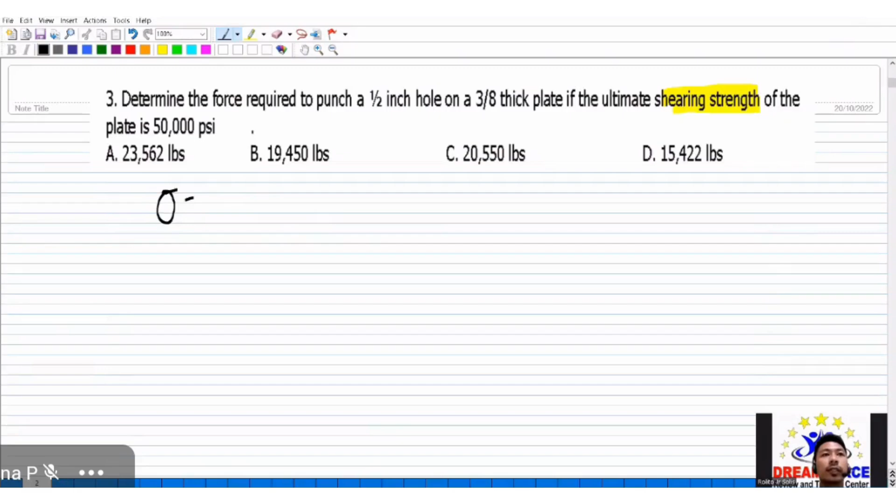So that would be your number 2. If Pascal is not in the choices, you can use Newton per square meter, or PSI. Pascal or PSI. Okay, so next, number 3, solving. Determine the force required to punch a 1/2 inch hole on a 3/8 thick plate if the ultimate shearing strength of the plate is 50,000 PSI. So here we have simple stress, and the given is shearing strength. As discussed in the lecture, when shearing strength is what we're using, use the formula for area which is pi times d times t. Again, using the formula for simple stress, we have stress equivalent to force divided by area.

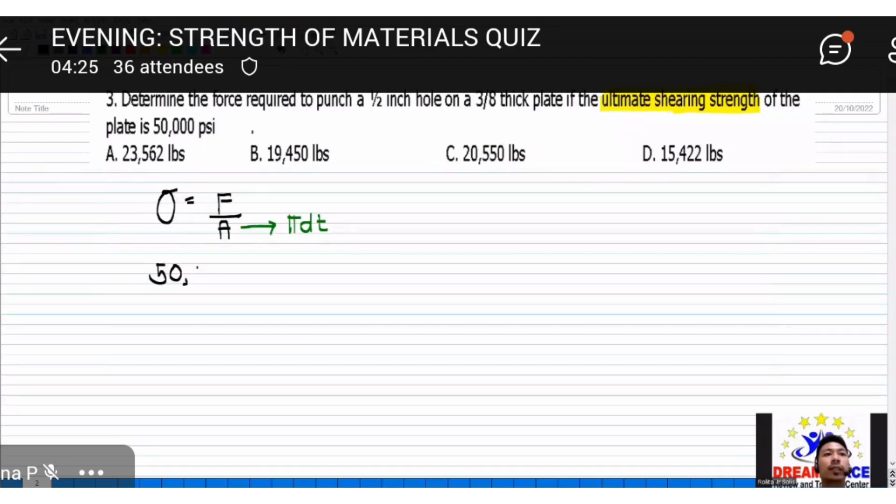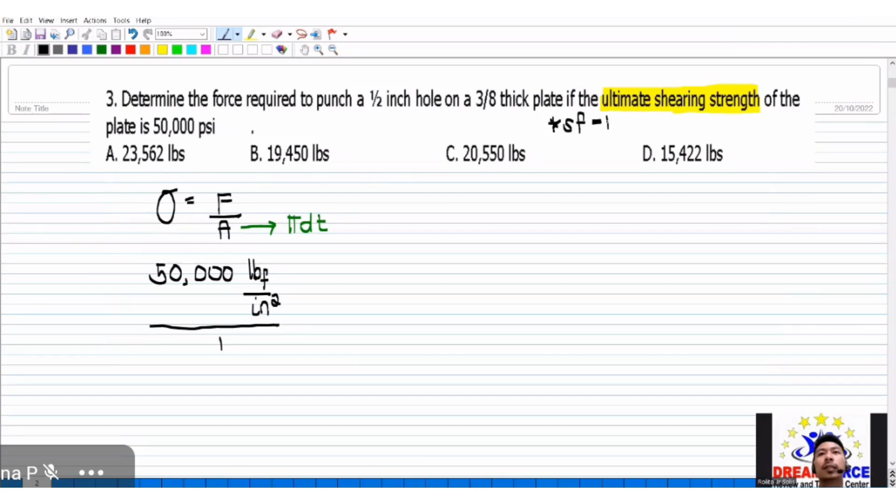The given is ultimate shearing strength, but we are not given a safety factor. So therefore, let's assume our safety factor is 1. From that, the ultimate shearing is also our allowable strength. So anyway, let's substitute - we are looking for the force. From that, we have our 50,000 PSI, which is also pound force per square inch. Let's just divide it by 1, since no safety factor was given, we assume it's 1. This is our allowable in the formula.

This is equivalent to the unknown force divided by pi, and then the diameter given to punch a 1/2 inch hole. Remember, by default, if no radius or diameter is specified for a circular cross section, always assume it's the diameter - like here, a 1/2 inch hole, no radius or diameter mentioned, so we assume diameter. So pi multiplied by 1/2 inch, and then also multiplied by the thickness, which is 3/8. Unit analysis - inches squared will cancel out with inches squared. So from that, calculate: we have pi times 0.5 times 3/8 times 50,000.

The answer there is 29,452.43 pounds. As you can see, engineers, in the choices, that's not there. So therefore, what we did is correct, so we are very confident with that.

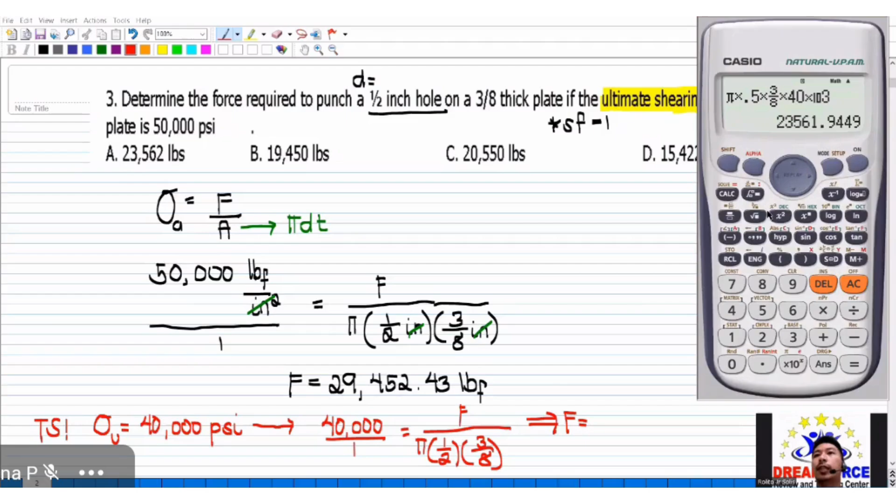Let's try 40,000. Divide it, again with safety factor of 1, so it's equivalent to the force divided by pi, times 1/2, times 3/8. Let's try - from here we already have an answer. So let's just replace the 50K with 40K. The answer there is 23,561.94 pound force. So from the choices, it corresponds to letter A. So therefore, our troubleshooting was correct.

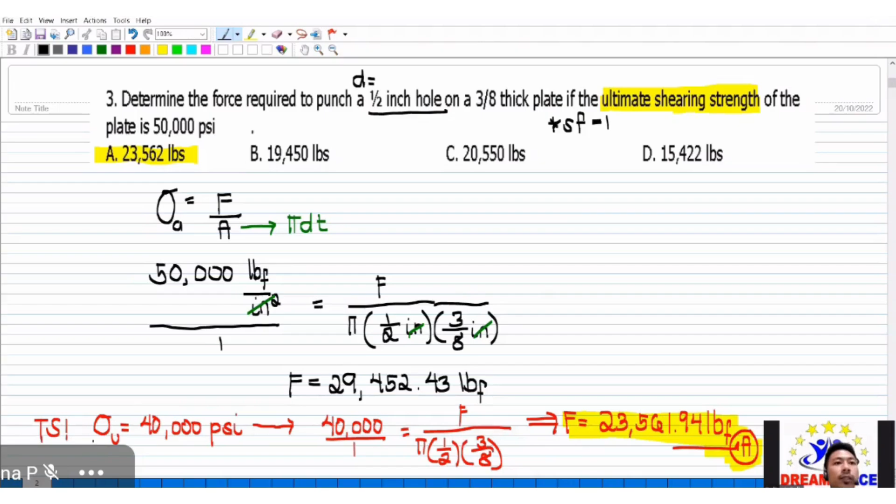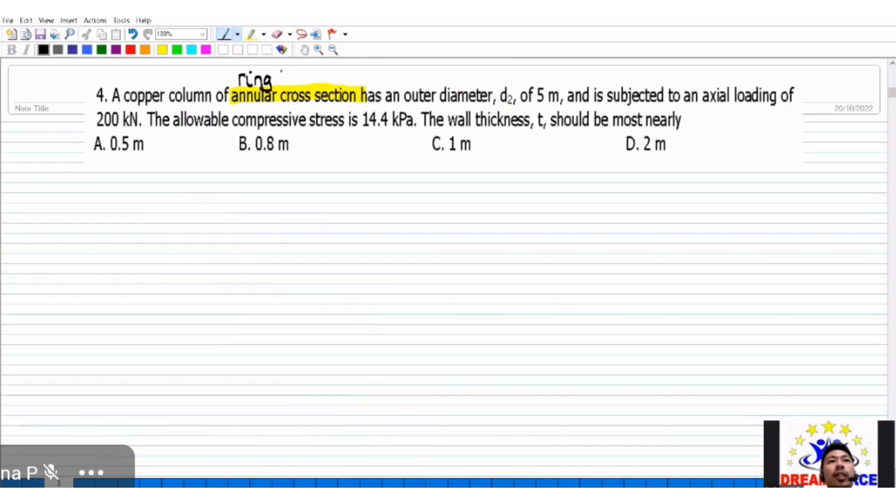Next one, let's solve number 4. A copper column of annular cross-section - annular means ring-shaped, so our cross-section is ring shape, meaning it is hollow. It has an outer diameter D2 of 5 meters and is subjected to an axial loading of 200 kilonewtons. The allowable compressive stress is 14.4 kPa. The wall thickness T should be most nearly blank.

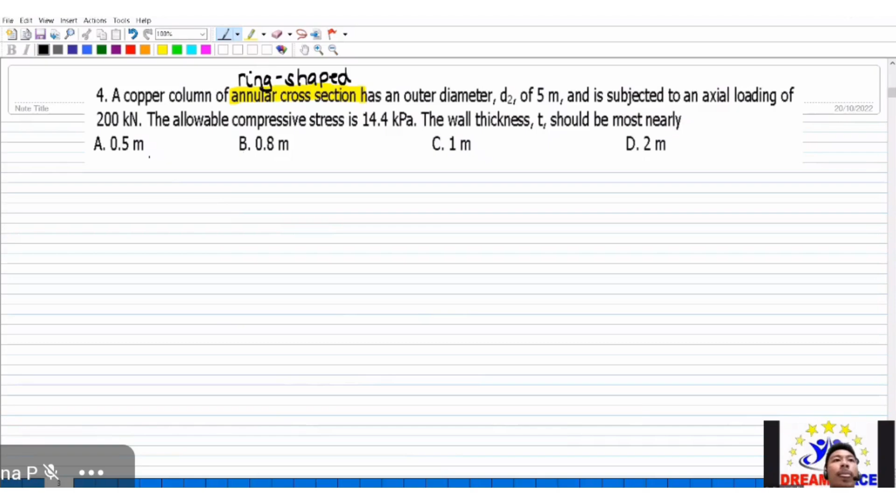As we discussed in the lecture, when it's hollow, we use either pi dt or outside square minus inside square. Keyword: if you have axial loading, or you might see tensile or compressive, use pi over 4 times outside minus inside. Also, ring shape is the keyword for annular cross-section.

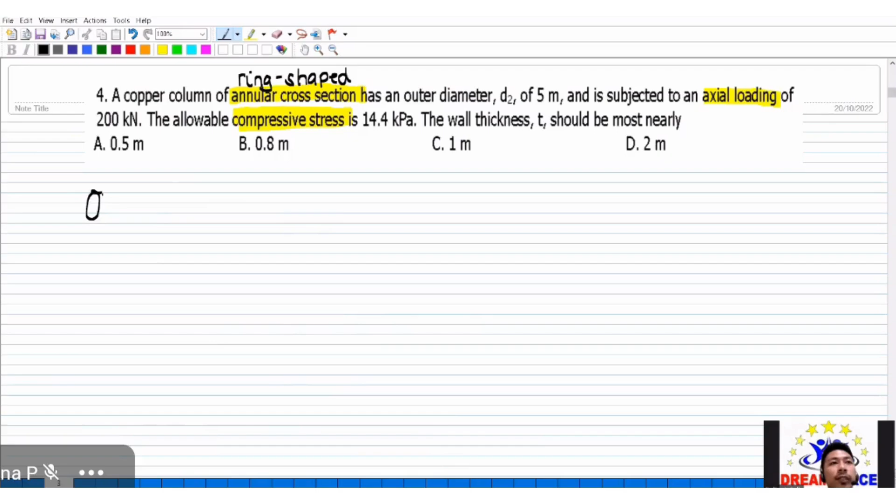So we have stress again - simple stress that is equivalent to force per area, force divided by area. Let's put it here. We have a hollow cross-section and axial or compressive loading, so compressive stress. Therefore, I will use pi over 4 times the outside square minus the inside square.

So here we have d2 - outside and inside. What we're looking for is the thickness. We have a relationship: we can replace outside diameter as inside plus twice the thickness. Since the outer diameter is given, I'll replace the inside in terms of outside diameter and thickness.

From that, we can now substitute. As you can see in the choices, it's in meters, so we'll base everything in meters. We have stress 14.4 times 10 raised to 3, since kilo - pascals, which is also Newton per square meter. This is equivalent to the given force, also 200 times 10 raised to 3 in Newtons.

So divided by pi over 4, multiplied by our outside diameter, which is 5, also in meters, squared minus the inside - but the inside is also the outside, 5, minus twice the thickness, squared. Engineers, no need to simplify - it's just one unknown, so don't simplify it, just enter that into your calculator.

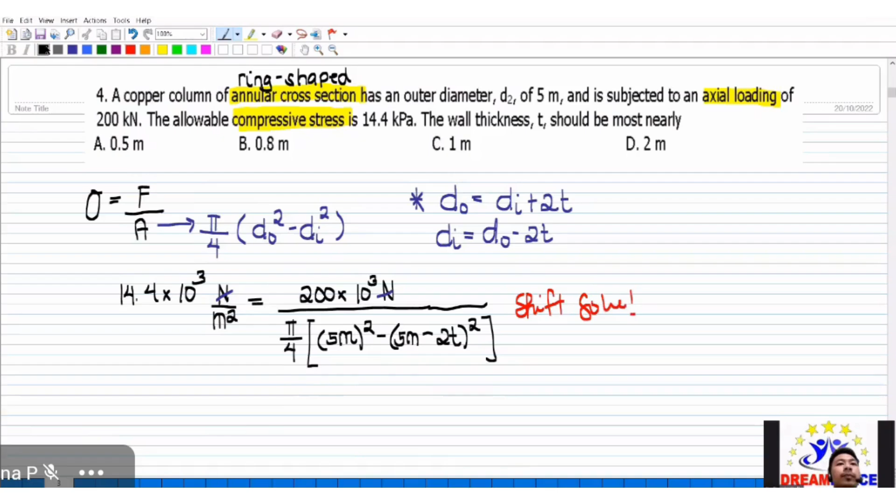Shift solve. The thickness would then be found - since this is algebra, to speed up the shift solve calculation, put in a limit based on the choices. So we have pi over 4 multiplied by 5 squared, minus 5 minus 2x, so 5 minus 2x squared, then shift solve, let's say 1.

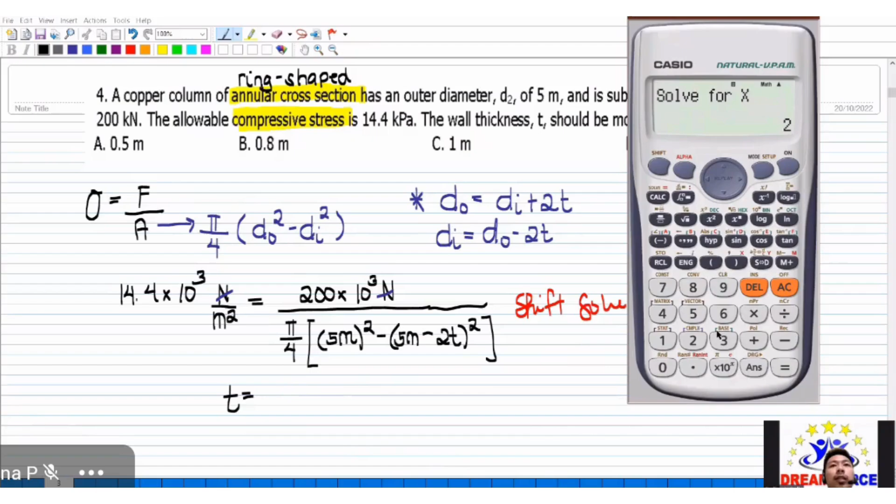The answer there would be 1.15 meters. That's correct with what we did, so we'll get the nearest answer, which is letter C. Also, engineers, that's correct because it says 'most nearly,' meaning round off. So that should be letter C.

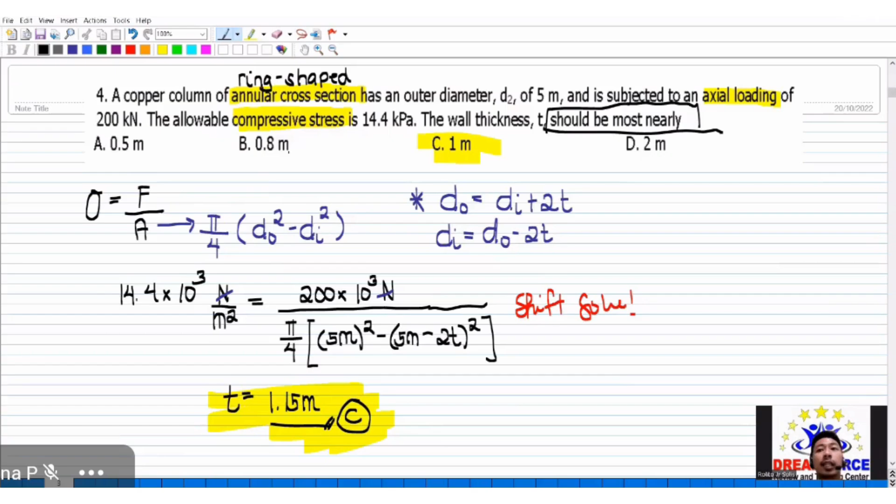Okay, next, number 5. Set objective: where do stress concentrations occur? For me, these kinds of objectives are difficult.

Okay, yung may mga 1, 2, 3. Lalong-lalo na, syempre, pag hindi or wala kang concept or wala kang knowledge. Okay, so doon sa tanong, so buti sana kung ito, no? So pwede nating i-analyze, okay?

So ang sagot dyan, where do stress concentration occur? Okay, so answer there is concentration. Ibig sabihin sa isang point, no? Keyword mo dyan, concentrated, syempre. Okay, so meron yang 1 automatically. Okay, so therefore, the answer there, concentrated loads, hindi naman pwede sa distributed, no?

Okay, so concentration, then discontinuities. Okay, so letter B, kaya nga concentration. Di ba yung concentrated loads, di ba sa isang point lang, ganyan. Okay, so pag sinabi nating distributed loads, from the word distributed, ayan.

Okay, and so analysis. And so that's your number 5. Okay, next one, so number 6.

Okay, so what is most nearly? Again, most nearly po ulit, so meaning round off. Okay, so the maximum allowable load of F with a cross-section, 125 millimeters each side. If the factor of safety is 1.5 and compressive yield stress, okay, is 20,670 kPa.

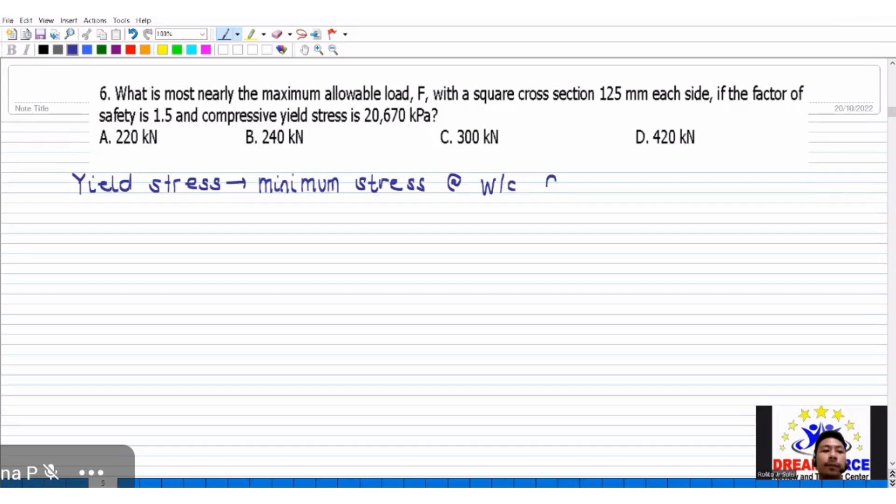Okay, so si yield stress, ito yung minimum stress. Okay, so kuha na lang po ng keywords. So minimum stress at which a solid, okay, so at which a solid will undergo permanent deformation. Okay, so we'll undergo permanent deformation. Okay, so deformation or plastic. Okay, so or plastic flow without a significant.

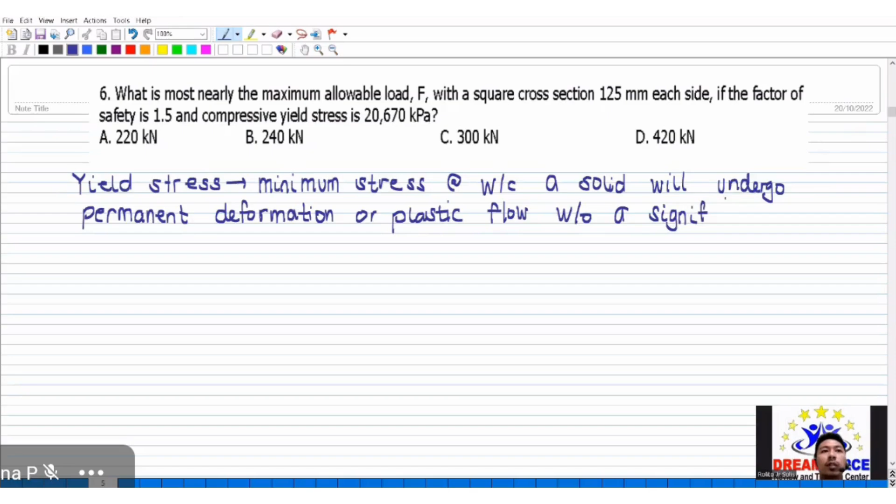So wag mo nang i-memorize yan lahat, no? So kuha ka lang ng keyword mo. Pwede na siguro yung minimum stress at which a solid will undergo permanent deformation. Okay? Without a significant increase in the load. Okay, so increase in the load. Okay, so or external force. And so that's the definition, no, so of your yield stress natin.

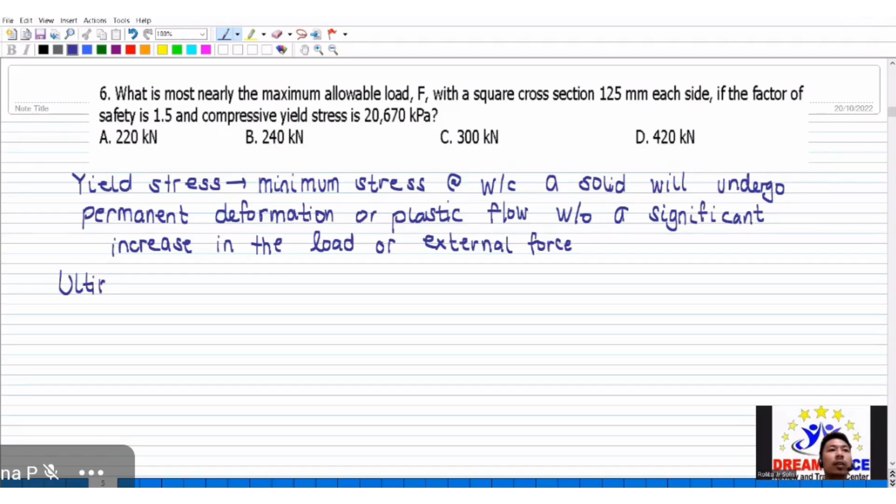Okay, so when we say ultimate naman, so from the word ultimate, ibig sabihin pinakamataas, no? Okay, so ultimate stress. Okay, so the definition of this is maximum stress a material can withstand. Okay, ito na lang. Okay, so yan na lang yung keyword nyo. So maximum stress, okay, so a material could withstand.

Okay, kasi mostly nang binibigay po nila ng question sa strength of materials or ESA sa board exam kapag ang subject ay strength is objective. Okay? Ayan, so kasi nga hindi natin to major, no? So kaya kung meron mang solving, we believe na yung mga direct substitution. So yung mga simple stress, ganyan. Okay, so yung mga shaft formula and so on.

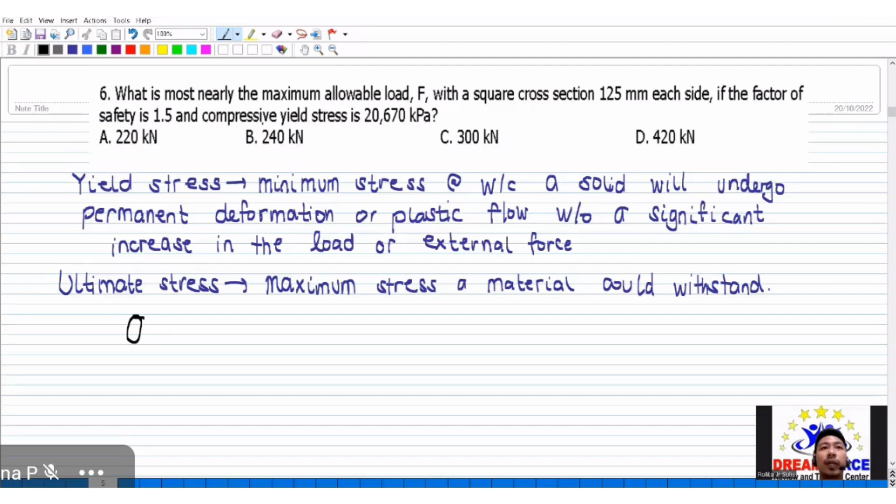Okay, so balik tayo dito. So ang hinahanap po natin is the allowable load. Okay, or that is the F also. Again, so simple stress. So sir, bakit po nasabing simple since compressive? Okay, so that is equivalent to force per area. Okay? Ayan, so again, this is your allowable.

So we have given this time, so ang binigay ay yield stress. Okay, so ginagamit natin na formula. So depende lang po yan sa material, kumbaga. Okay? Di ba, yung ginagawa natin, so yung yield, somehow, ipinaparehas na natin siya sa ultimate. Kasi the same lang sa formula. Okay, pero sa definition engineers, magkaiba po siya.

Ayan, so again, so solving for allowable, so that is the yield. Okay, yield or maximum. Okay, so divided by our safety factors, we have your 1.5. Okay, so yan, so this is Pascal or Newton per square meter. So this is equivalent to, so wala naman tayong indication, engineers, no, na hollow.

And then also, nga po pala sa square cross section. Okay? Ayan, so hindi po siya laging mostly circular in cross section, but sometimes nag-iiba. Okay? Ayan, so be careful with that. So we have your force unknown. And then divided by, so 125 millimeters.

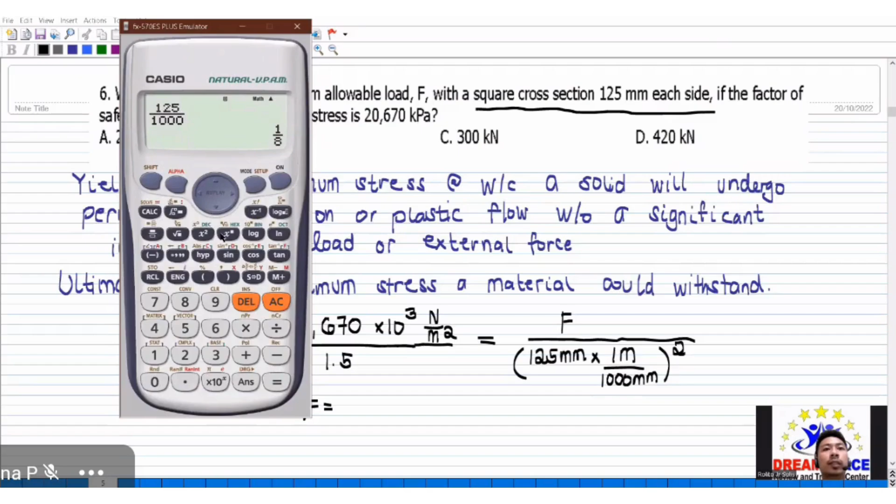Again, unit analysis, so we can convert that. So 125 mm, okay, convert natin sa meters para mag-cancel yung square meter. Okay, so 1 meter in 1,000 millimeters, then square. Okay, kasi square cross-section, no? Okay, so from that, so we have your 125 over 1,000, okay, square, and then times 20,670 times 10 raised to 3 over 1.5. Or you can use Shift ENG. Okay, gawin natin kilonewton, so that is approximately 215.3125.

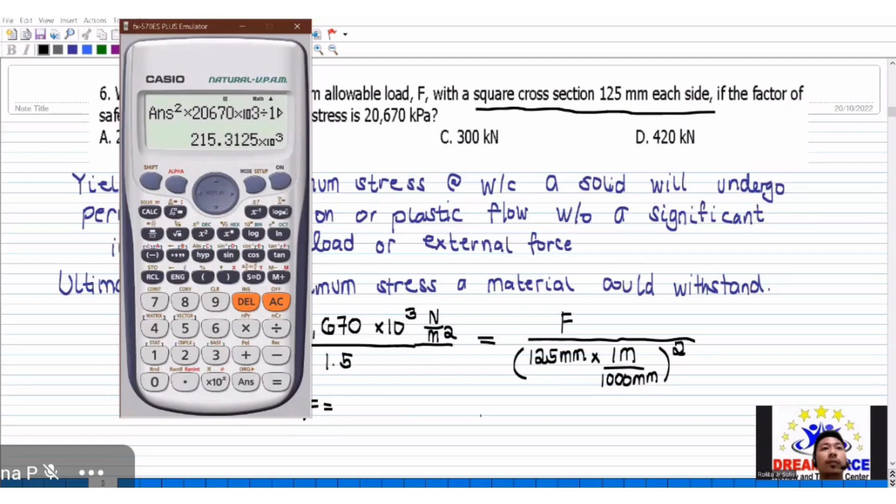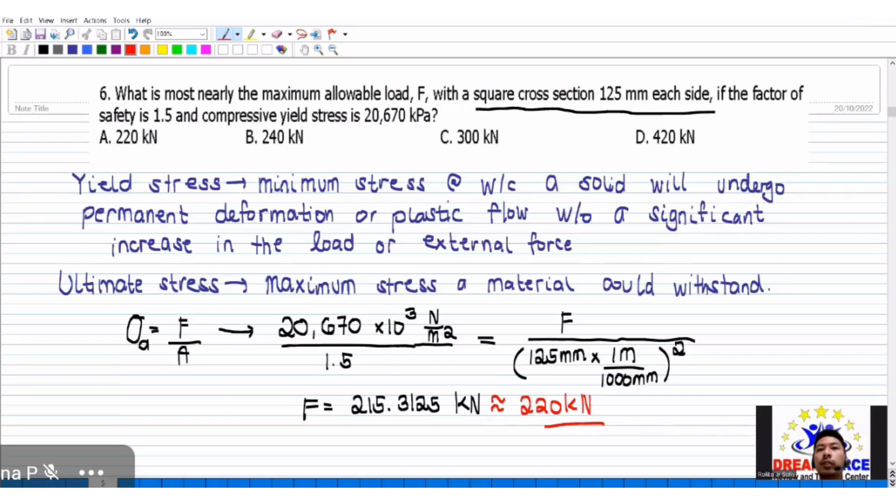Okay, kilonewton, so that's our solution. So ang hinahanap naman ay most nearly, so therefore it is approximately 220 kilonewton. So from the choices, that is letter A, kasi ang tinatanong ay maximum.

So that's number 6. And for our quiz, kinuha ko sa mga resources na pinagkukunan ng board exam, just like Pinoy Bix, Lindeburg, and some other resources. So that's number 6.

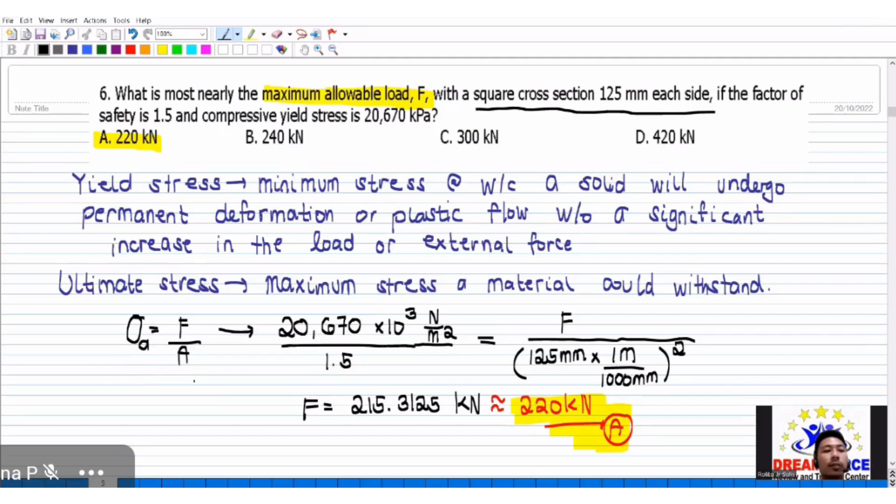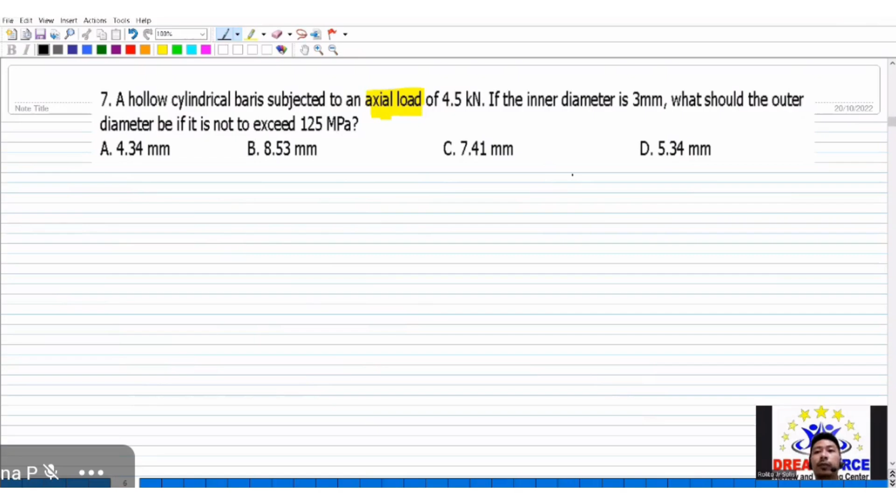Okay, next one, let's continue solving. Number 7, another problem. So ito naman hollow, hollow cylindrical bar is subjected to an axial load of 4.5 kilonewton. If the inner diameter is 3 millimeters, what should the outer diameter be if it is not to exceed 125 megapascal? Again axial, so ibig sabihin that is simple stress. We can either use pi dt or the other formula, but since axial yan, meaning it is either tensile or compressive. If that's the case, gamitin natin yung outside square minus inside square.

Okay, so yan na po yung gagamitin ko para diretso tayo sa choices na millimeters. Kung ayaw mo naman, okay lang, ang makukuha mo dyan ay meters, then later on your final answer, divide mo siya, o multiplyan mo ng 1,000 para maging millimeters. So again this is pi over 4, multiplied by, ang hinahanap na ay outside, hindi na natin siya in terms of thickness. And then given also is inside.

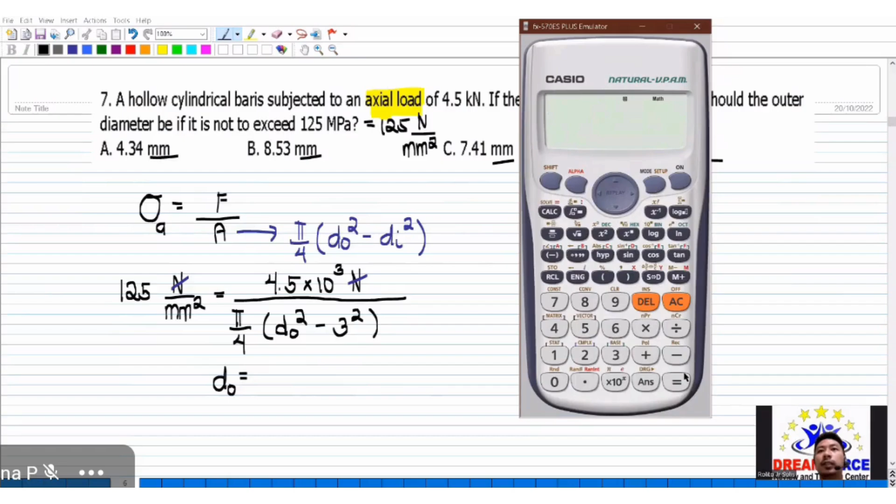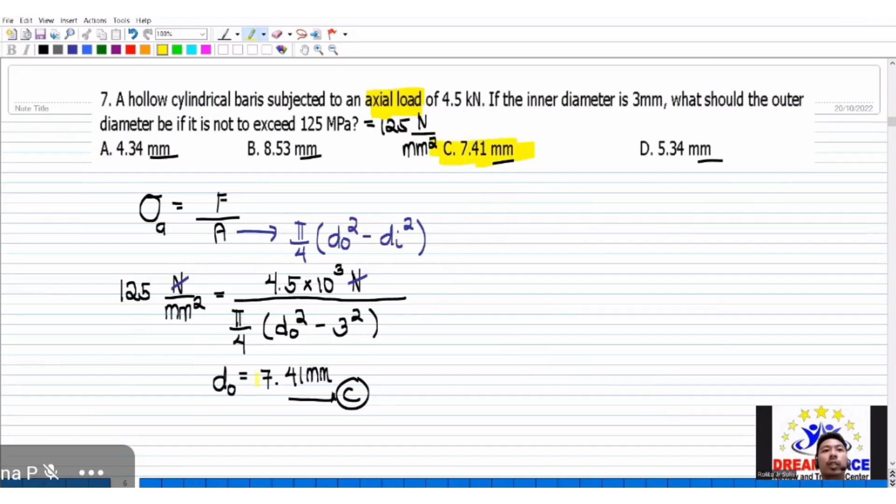Okay, shift solve, let's say 8. Yan, so the answer there is 7.41 millimeters, okay that is letter C. I hope kabisado naman natin yung shift solve at saka calc, since ilang beses nyo na itong ginamit. So that's number 7.

Sige, next, let's solve number 8. Okay, so cylinder of diameter 1.0 cm at 30 degrees Celsius. Obvious naman tong troubleshoot niya, engineers, no, that should be 30 degrees Celsius. Nung board exam, I think September 2021, yung kunwari 9 degrees Fahrenheit dapat, nakaganyan siya, 9 raised to 1/2. Ayan, pero may inspect mo naman yan kasi madaming problems na naging ganito, okay kaya kayang i-troubleshoot. So anyway, to be slide into a hole on a steel plate.

So the hole has a diameter of 0.99970 cm at 30 degrees Celsius. Question: to what temperature must the plate be heated? Coefficient of linear expansion for the steel is 1.2 times 10 to the negative 5 per degree Celsius. Ayan, so must be heated, ibig sabihin isipin mo kagad, yung sagot mo dyan, syempre papainitin, tataas yung temperature. Which is, ang hinahanap is the final temperature.

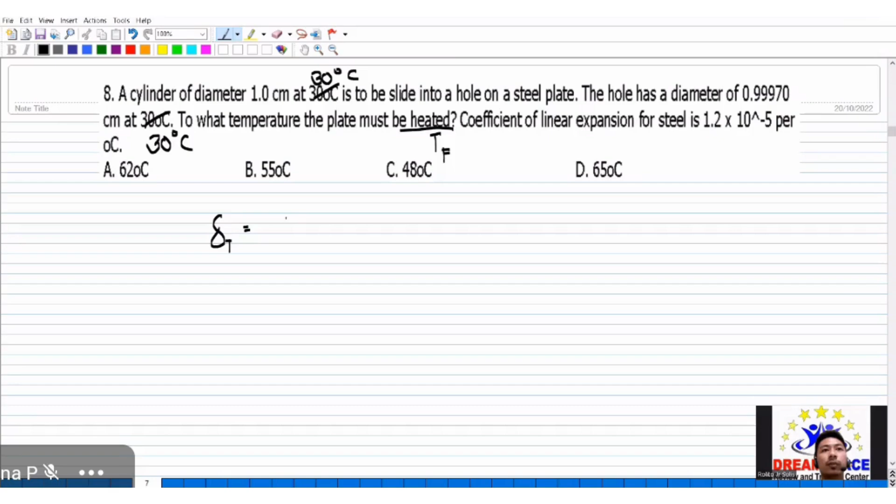Since this is expansion, relating it to the formula, we have elongation due to temperature. This is equivalent to our mnemonic, ALAT: alpha, which is the coefficient of temperature or linear expansion, the initial length, and the change in temperature. Elongation is the same as change in length, the difference of final minus initial length.

Let's substitute. We have the given initial diameter of 1.0, and there's a hole. It became 0.99970. So our change in length is 1 minus 0.99970 centimeters.

This is equivalent to the given linear expansion, 1.2 times 10 to the negative 5 per degree Celsius, multiplied by the length, which is the initial length. Here it's the same as the diameter, so we have 1 cm.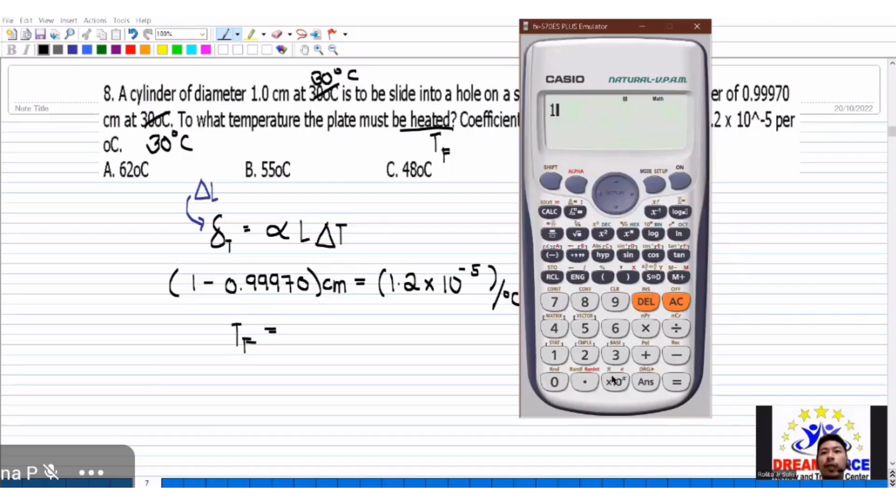Since it's a circle, that's multiplied by the final temperature minus the unknown initial temperature — or rather, final temperature minus 30, which is the initial temperature. Using shift solve: 1 minus 0.99970 equals 1.2 times 10 to the negative 5 times 1 times (x minus 30). The answer is 55 degrees.

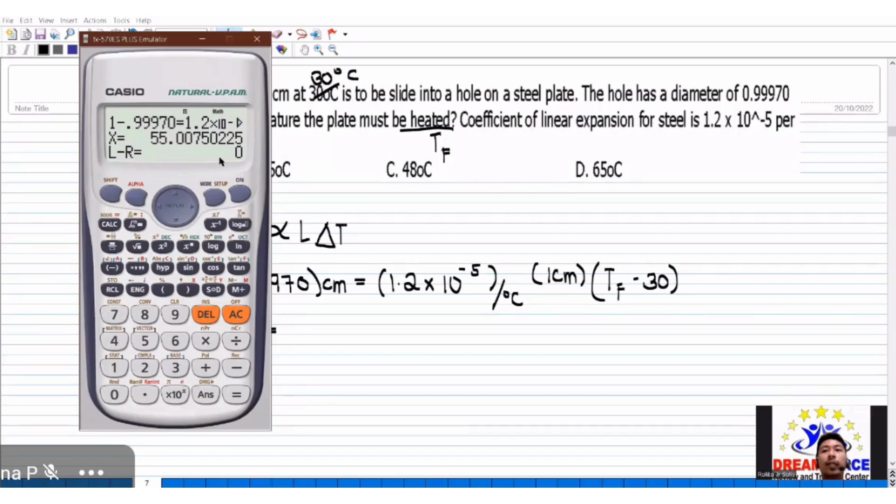What if we input 0.99970 instead? Using shift solve, we get the same result: 55 degrees Celsius. So the answer is 55 degrees Celsius, which is letter B.

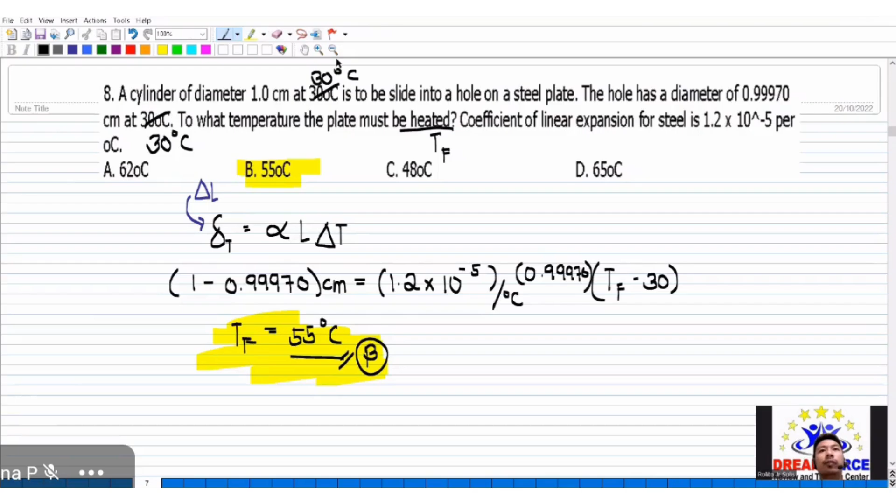But for strength of materials, it's usually formula-based for most problems. Number 9: strength of materials can most aptly be described as statics of deformable elastic bodies, which is letter A.

Next, number 10: it states that elongation is proportional to the force — that's Hooke's Law, letter B. Recall our formula, PL/AE. We can also say, per Hooke's Law, that stress is proportional to strain — that's another way to define it.

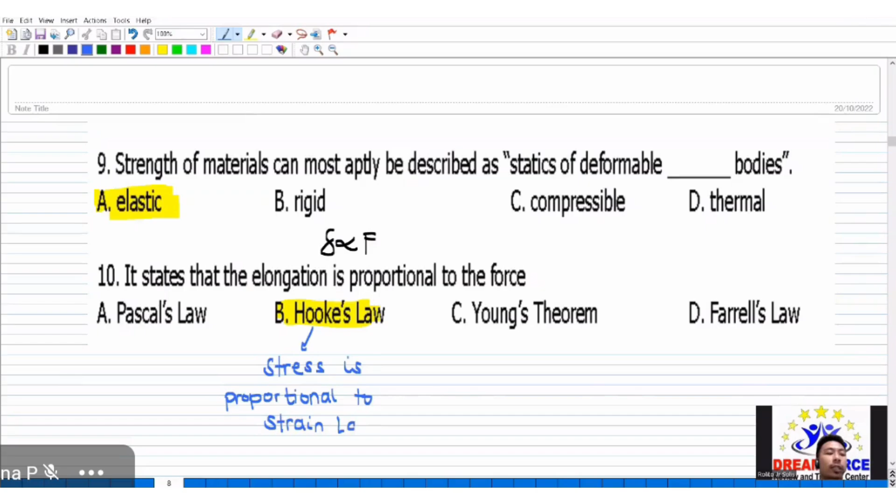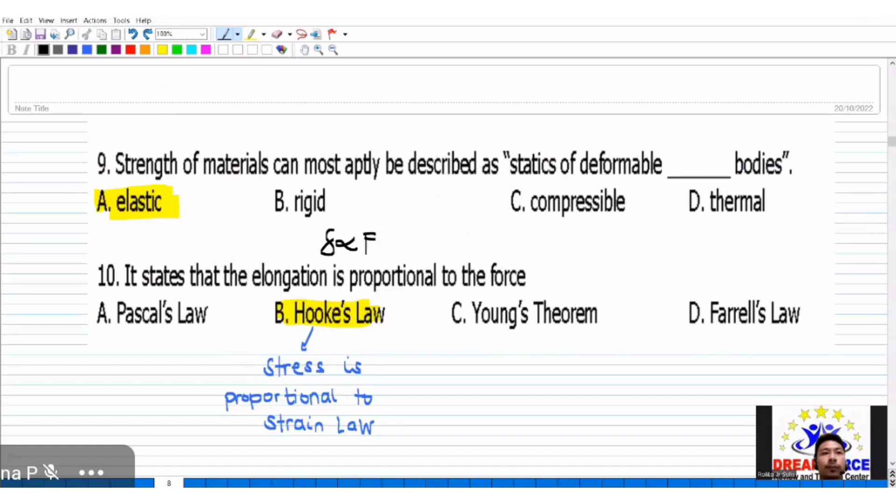Pascal's Law we already know from thermodynamics. Young's theorem is all about partial derivatives in mathematics, and Farrell's law is in meteorology — none of these relate to strength of materials. So for choices you're unsure of, you can use process of elimination, like Pascal's law, which has nothing to do with elongation; it's about pressure. That's number 10.